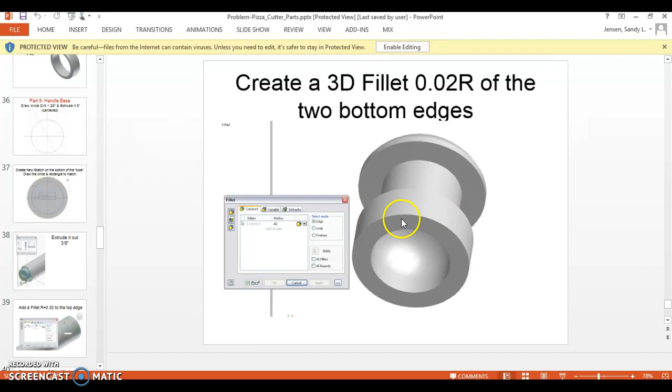Make sure that you put a fillet on this edge right here for this object so it's rounded like they have in the picture. I don't think I told you to set it, but if you follow the steps, you should have a rounded edge right here, and that includes the inside as well. Make sure you do both so it looks rounded right here, and you have the rounded edge on the inside from the drawing.

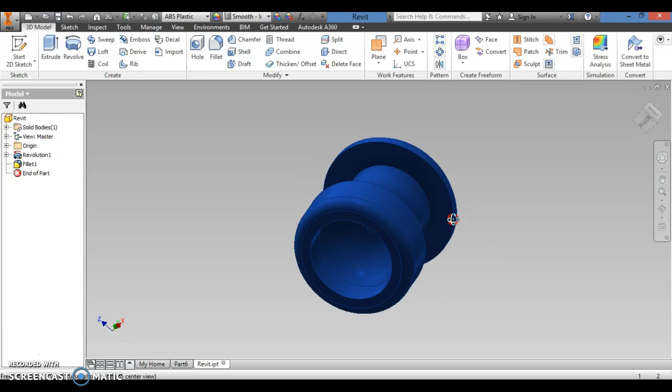So it should look something like this. Once you are done with that, you're going to go back into your guard, and I'm going to go ahead and open mine up here. It might take a second to open up.

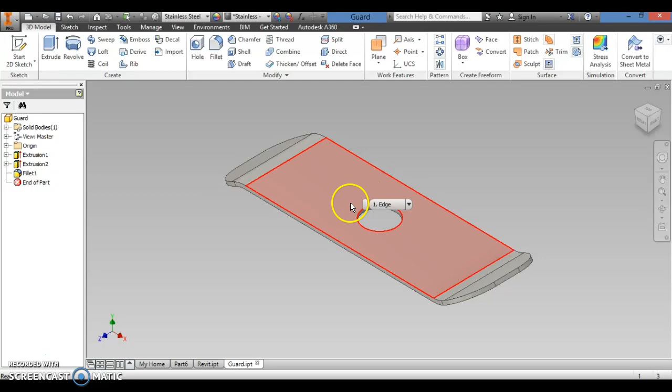Once you have this guard open, we originally put a circle in the middle of this. We're going to do away with the circle because I want to see that you guys can edit these part files and change stuff that we've already done in the past, easily going back into these.

So we're going to change it to match up with the extrusion that we made right here on the top, and we want it to match up with this right here. On my screen, that dimension for it is 0.5 by 0.096.

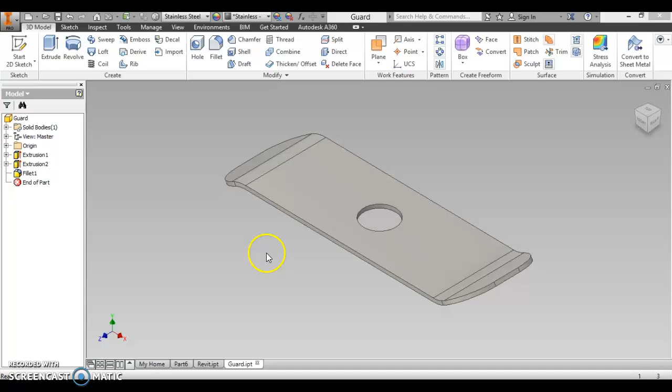So we're going to go ahead and, for this extrusion right here, we're actually going to edit the sketch. I opened up the plus icon or the little drop down arrow, double click on the sketch. I can leave my circle here for a minute because I'm going to build this next point.

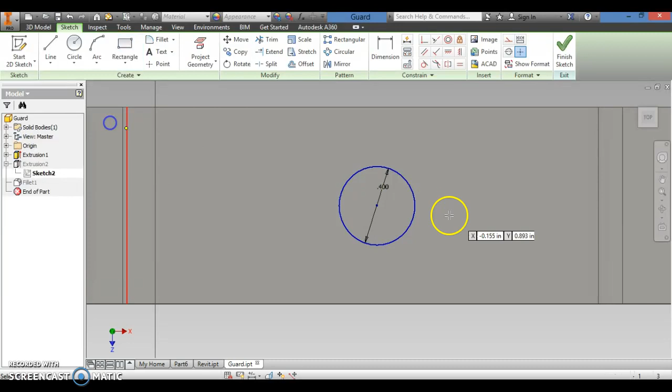I'm going to go with rectangle. When we go to choose the rectangle, I'm going to choose 2 point center. So I want this to be my point, this is my center. Then from here, I'm going to change to those dimensions, 0.5.

So 0.5, and then I'm going to hit tab, and I'm going to change the other dimension to 0.096. So 0.096. You should have something that looks like this.

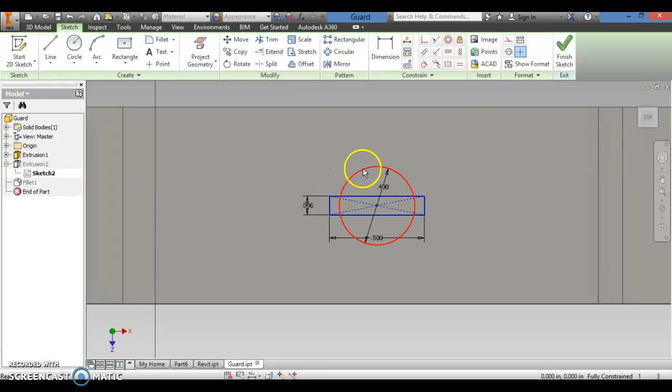At that point, you can go back in and click on the circle, and you can delete it. When you finish the sketch, it should auto update the extrusion to now be that rectangular cutout that we placed instead of having a circle.

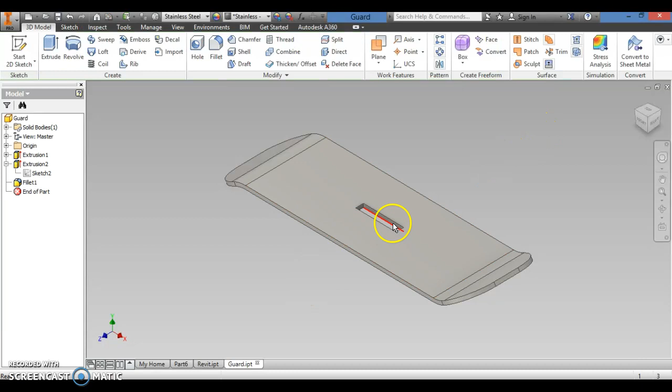If it doesn't, we can adjust that. So hit finish sketch, and it auto adjusted it. If it gives you some kind of error for some reason, right click on extrusion, hit delete, and when it pops up, uncheck delete the consumed sketches, and just redo the extrusion.

But I'm not going to actually delete it for this one. So once you've done that, update the part, save it, and then we're going to start the assembly.

So I'm going to create a new part file. It doesn't really matter how you—or not a new part file, but a new file—and it's going to be an assembly.

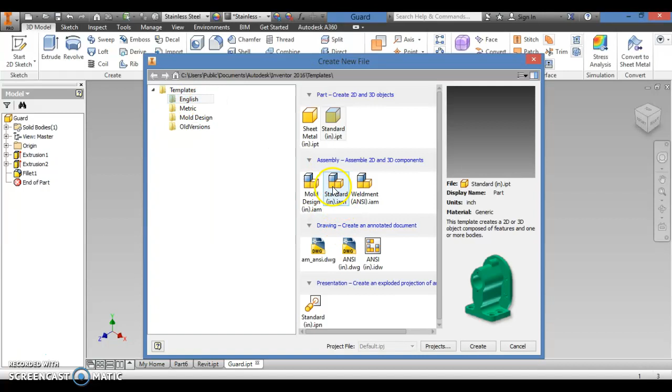Standard.iam, this one right here. Remember, your interface might look a little bit different than mine currently looks. So it's going to load up the assembly file, and it may take a second.

And then I'm going to import all of those pieces into the same area. So I'm going to place, and I'm going to start with placing my handle, my blade. So I've got my handle right here, I'm going to go ahead and open that, and I'm just going to place it.

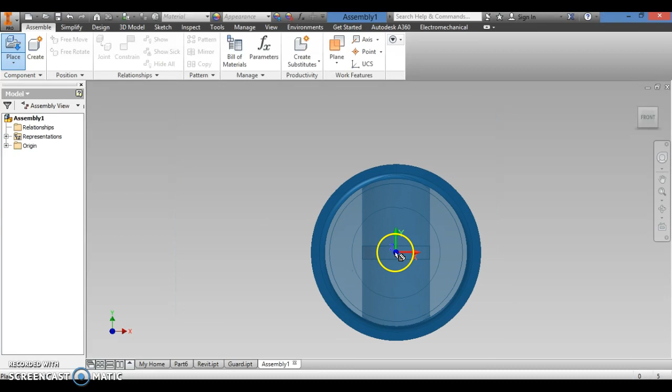I'm actually going to right click on this, hit escape, and right click on the handle. Before I place anything else, I want to ground this part since it's the one that I'm basing everything off of. Then I'm going to place the remainder of the parts.

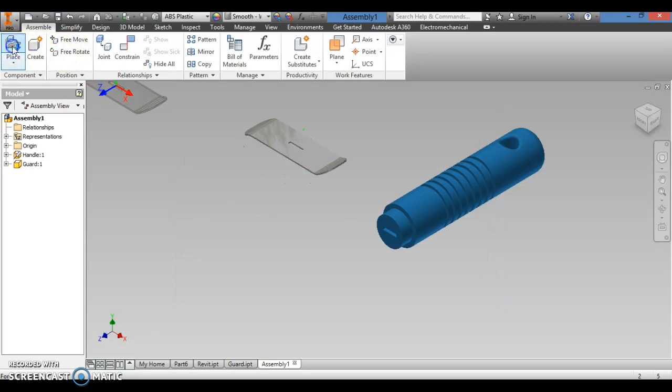So I'll go ahead and place the guard. I'll just place it here. We'll place the blade—it looks like I already placed one. I'm going to drag this over here. And then I'm going to place 2 arms.

Yes, you need 2 of them, just like this. And then you're going to place the rivet - I named it Revit, which isn't what it's supposed to be called, so make sure you name it appropriately. I've got the part right there, it's a little darker than the other blue, but I have all the pieces I need to assemble this.

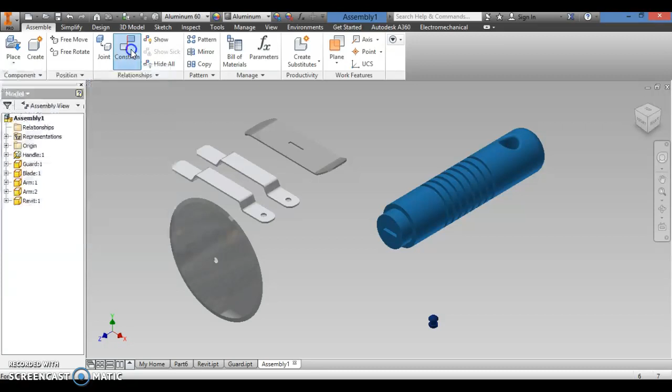So the first thing I'm going to do is constrain. It doesn't really matter this side or that side, but I'm going to use a regular mate constraint, choose this area right here, then hit escape so you can see it's on this portion now. I want to line up this hole with this hole that I created.

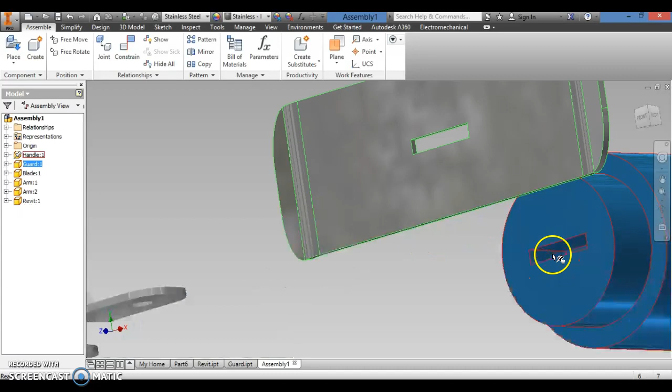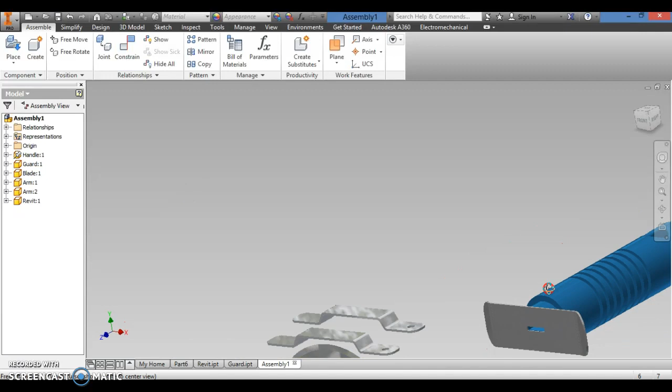So I can easily constrain these two by using the flush tool. I want this side to be flush with this side, and you could choose different sides depending on how you have it facing, but I have it just like that. I'll zoom out so you can see it, hit the home button again, and that piece shouldn't move any longer. So I have that in place.

The next portion I want to place together can be done as separate assembly files. I'm going to show you how to do this as just one assembly file for this one, and I'll go ahead and constrain the blade together.

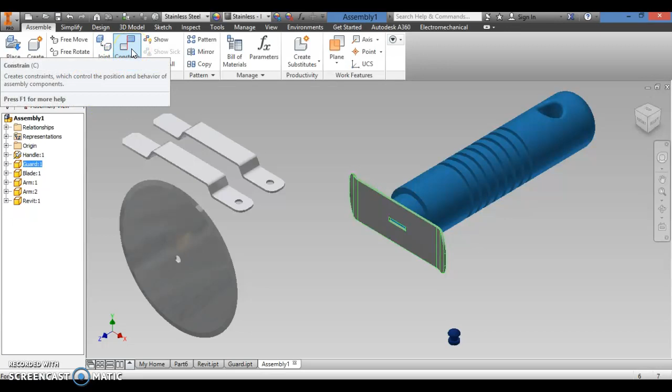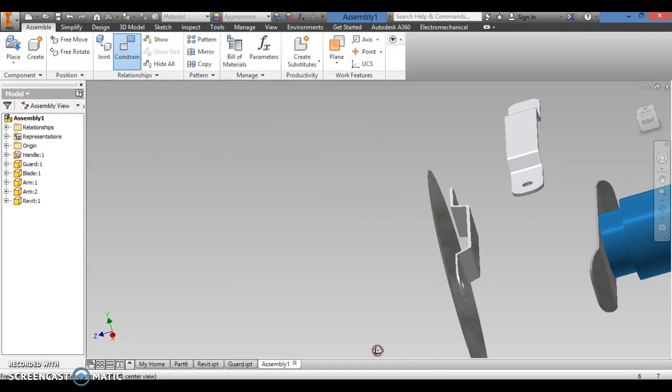So we're going to put this piece right here, find the center of it like that, then find the center of the hole here, and hit apply. I want to see how it placed, and it looks like it placed the correct way. If you need to, you might have to flip the parts around, but it placed.

And then I'm going to actually constrain with the mate option this side or this surface to this surface like that. I'm going to do the same exact thing with this other portion I have right here.

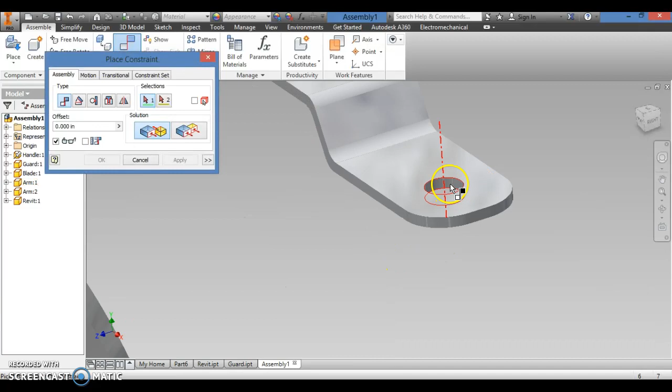So again, here to this hole, and I believe it put it on the outside. If it does that, you just grab the other part - it's this one right here - and slide it through. Then we're going to constrain this side right here to this side, and it should flip it around.

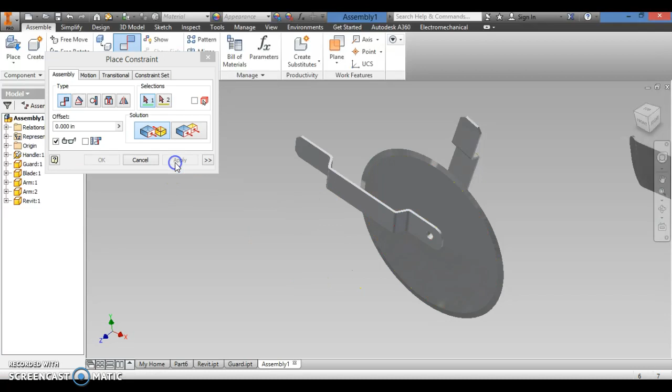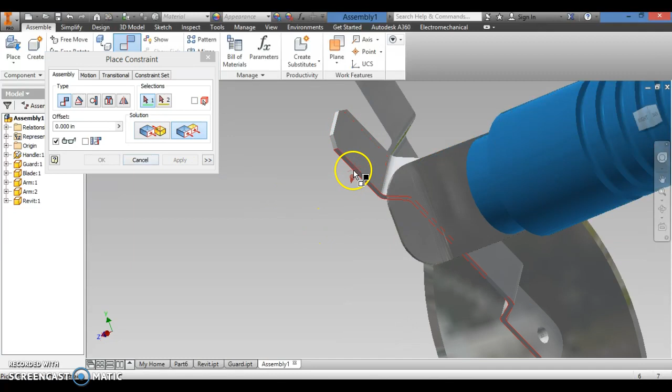Once you have that in place, you can freely move these around, and I can actually get them lined up the way I want. But I'm going to constrain this portion with the mate tool to this portion right here, and then I'm going to flush the edge of this with the edge of this.

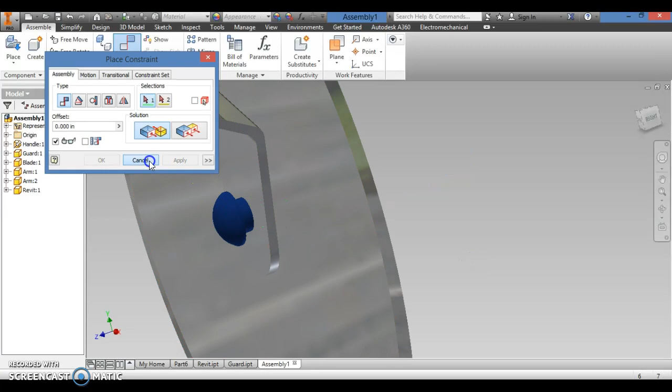So far I don't have any errors showing up, I have all those pieces connected together. Then I'm going to constrain this piece right here into the middle, right there. And yeah, it's there - it could pop up on the other side depending on how you do it.

And then I'm going to flip this and mate this side to this side right here. Apply, cancel that out, goes through to the other side. I have my blade in there, shiny materials, and from there we can constrain this portion into the bottom portion over here.

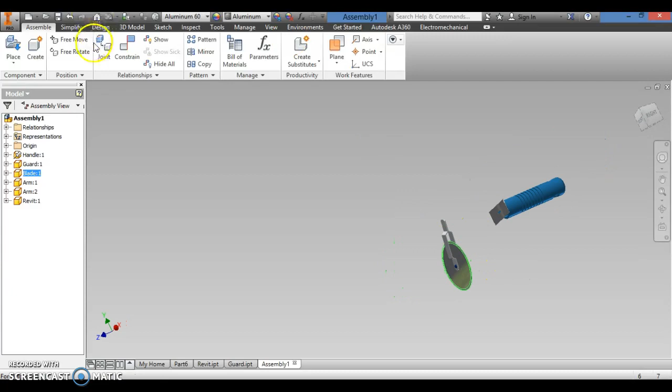So I'm going to try to find the very inside of this right here, and then rotate to the top of this, hit apply. So I now have that in place, and I'm going to pull this out so I can actually see it a little better.

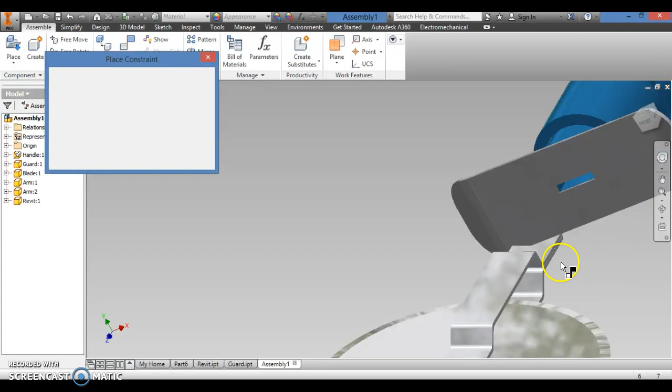And then I want to get this surface, this flat surface, and constrain it to the edge of this one. Then I'm going to move this again because it's not quite where I want it to be. I need the flat side here to be constrained to the edge of the pizza cutter here.

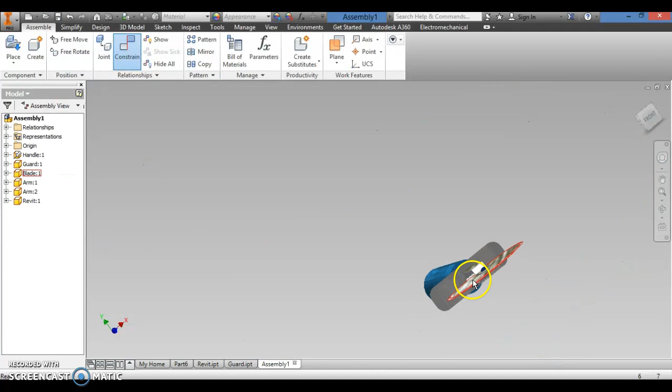Hit apply, and then you should be able to cancel that out. The pizza cutter should be in a good position, shouldn't be moving, and it should look like this.

So once you have that done, go ahead and save the assembly file. I will make another video that shows you how to assemble them separately, because there is another way to do this and then piece them together.

So go ahead, file, save as, and this one you can fully save as pizza cutter or pizza cutter complete - it doesn't really matter. I'm going to save this one as pizza complete, and then just save it, hit OK, and you're done.